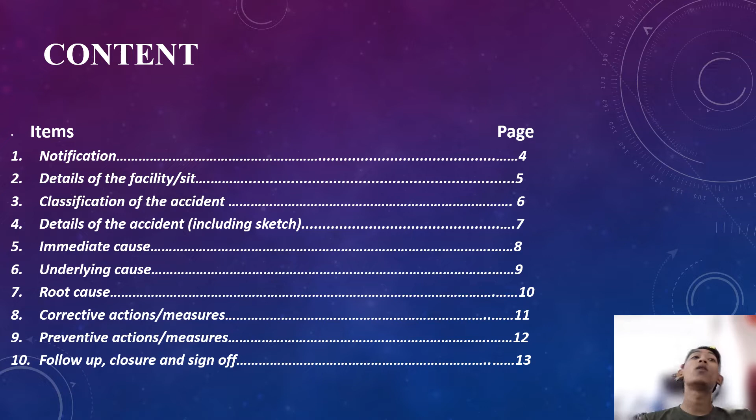Next, we start with notification. Based on NADOPOD 2004, the reporting time period to DOSH is within 7 days to send a report in approved form. The report must be sent to the nearest DOSH office by the quickest means available.

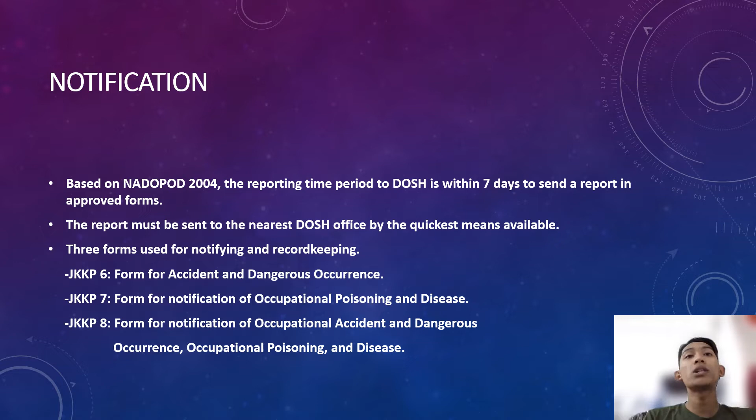There are 3 forms used for notifying and record keeping: first, JKKP6 form for accident and dangerous occurrence; second, JKKP7 form for notification of occupational poisoning and disease; and last, JKKP8 form for notification of occupational accident and dangerous occurrence, occupational poisoning and disease.

Next, we go to the detail of the facility site. Enterprise Products Pascagoula Gas Plant, PGP, is located in Pascagoula, Mississippi. It was built in 1998-1999, with the initial partners being Amoco Production Company with 60%, and Shell Midstream Enterprise.

The factory takes raw natural gas via pipeline from offshore oil wells in the Gulf of Mexico and separates it into two products: liquid natural gas, used as a raw material in the chemical industry, and natural gas fuel stream, mostly made up of methane. PGP is covered under the Occupational Safety and Health Administration (OSHA) Process Safety Management Standard and the Environmental Protection Agency Risk Management Plan rule.

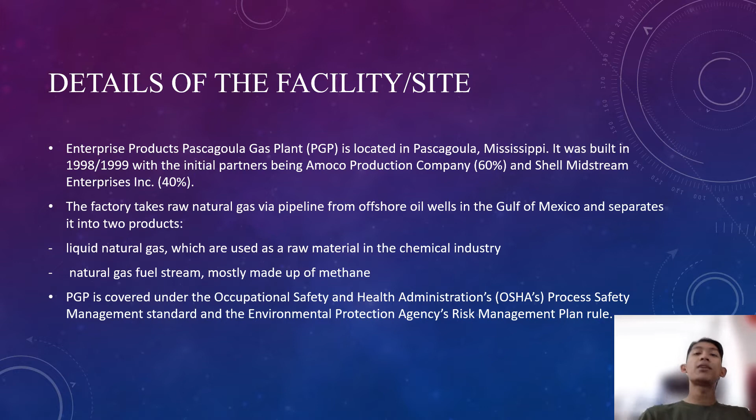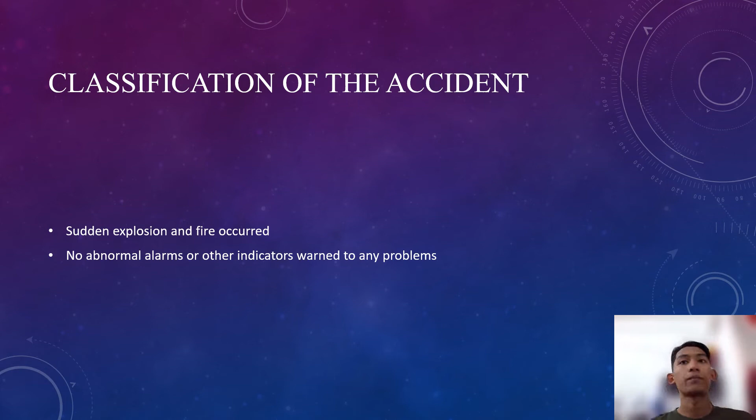Next, we go to classification of the accident. For this, my classification is sudden explosion and fire occurred. No abnormal alarm or other indicator warned of any problems.

Next, the detail of the accident, including sketch. On June 27, 2016, an explosion and fire occurred at the Enterprise Pascagoula gas plant in Moss Point, Mississippi. That night, two PGP employees, a control board operator and an outside operator, were on duty.

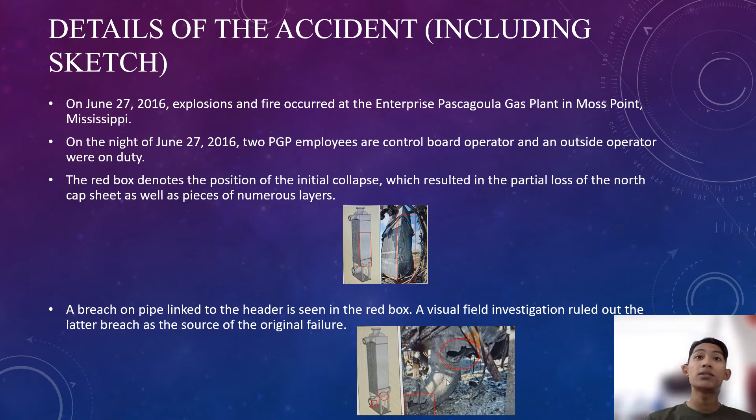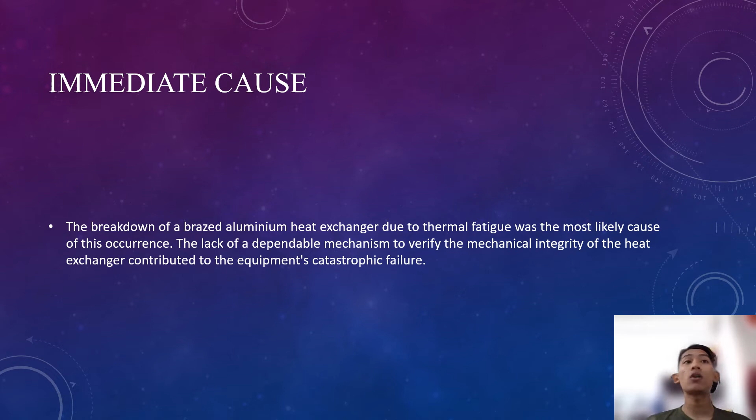Next, immediate cause. The breakdown of a brazed aluminum heat exchanger due to thermal fatigue was the most likely cause of this occurrence. The lack of a dependable mechanism to verify the mechanical integrity of the heat exchanger contributed to the equipment's catastrophic failure.

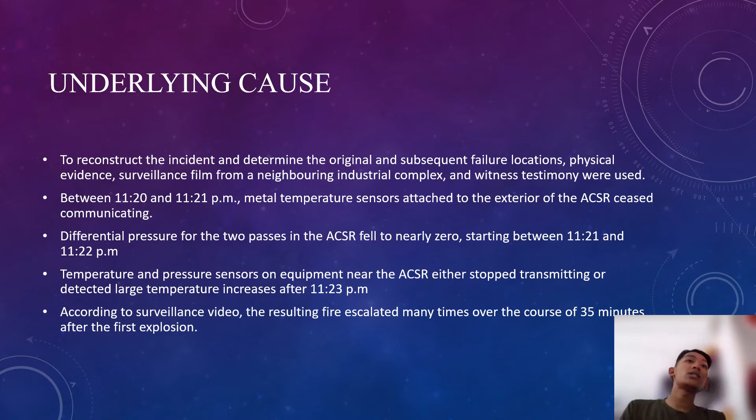Next, underlying cause. I have five points. The first is to reconstruct the incident and determine the original and subsequent failure location. Physical evidence, surveillance film from a neighboring industrial complex, and witness testimony were used.

Between 11:20 and 11:21 p.m., a metal temperature sensor attached to the exterior of the ACSR ceased communicating. Third, the differential pressure of the two passes in the ACSR fell to nearly zero, starting between 11:21 and 11:22 p.m. Fourth, temperature and pressure sensors on equipment near the ACSR either stopped transmitting or detected a large temperature increase after 11:23 p.m.

For the last point, according to the surveillance video, the resulting fire escalated many times over the course of 35 minutes after the first explosion.

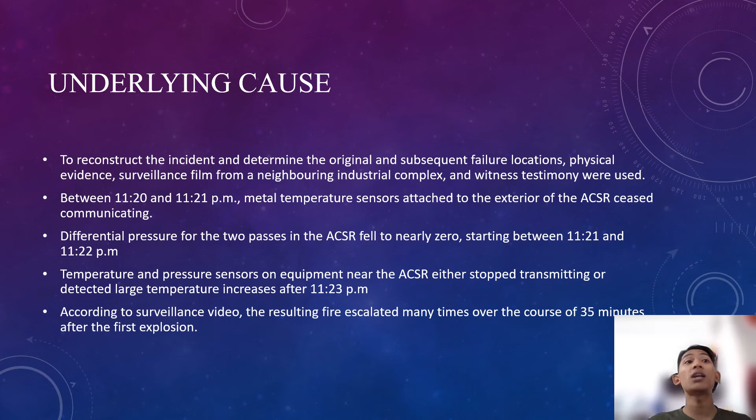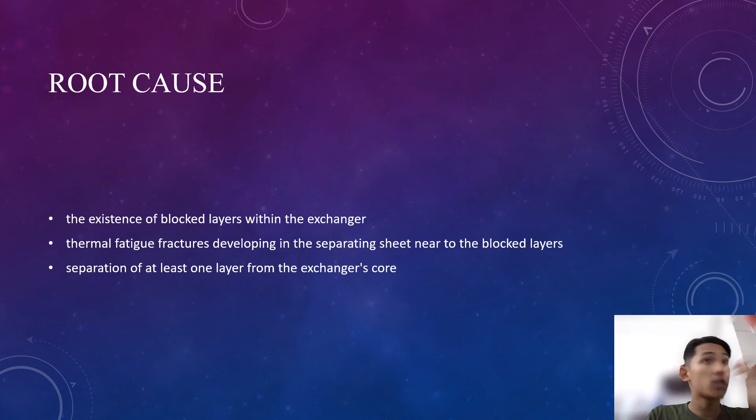For the root cause: the existence of blocked layers within the exchanger, then thermal fatigue fracture developing in the separating sheet near the blocked layers, and the last is separation of at least one layer from the exchanger core.

Rectification and measure: the employer should document that the equipment conforms with generally known and accepted good engineering principles. Because of that, the employer should publish technical reports or recommended practices for staff or employee safety, and ways to execute certain engineering inspection or mechanical integrity activities such as manufacturing a vessel, checking a storage tank, or maintaining a relief valve that are commonly accepted to be safe.

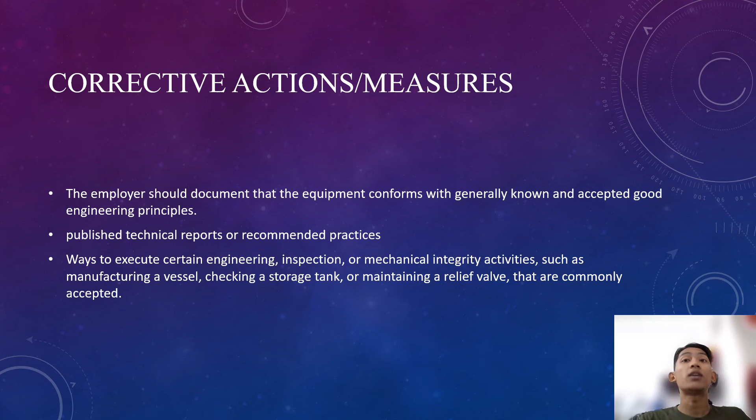Preventive action and measure: recommended installing metal temperature sensors on the exchangers and making procedural modifications, citing industry guidance to control the rate of temperature change on the exchanger core to less than 3.5 Fahrenheit per minute, as you can see.

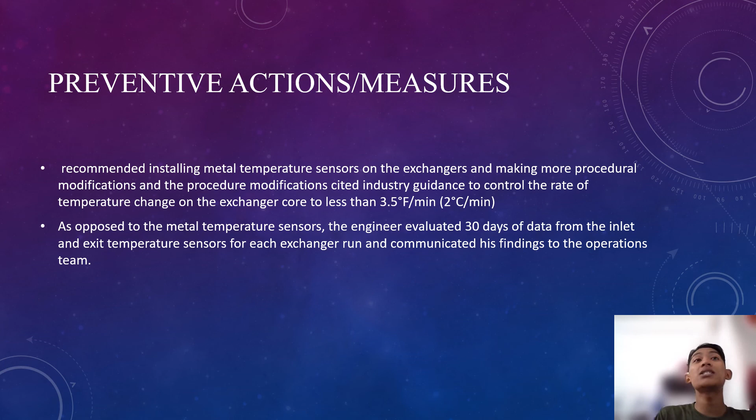Second, as opposed to the metal temperature sensor, the engineer evaluates 30 days of data from the inlet and exit temperature sensors for each exchanger run and communicates findings to the operation team.